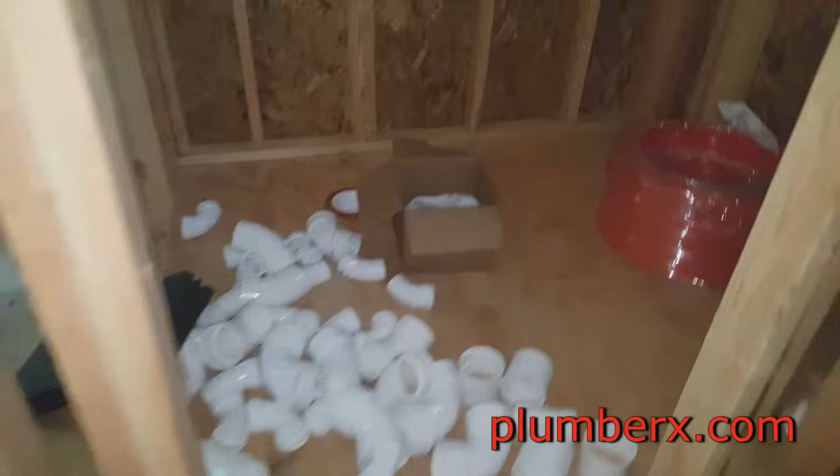Anybody can glue two pieces of pipe together. PVC? Anybody. True, but not so true. Gluing pipe together is one thing. The theory of plumbing is another. If you don't understand the theory of how plumbing works, you can't just glue two pieces of pipe together.

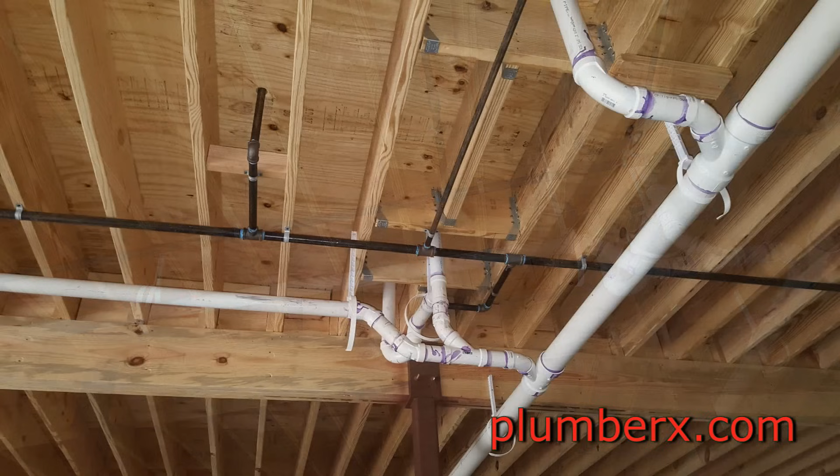You got to know the order that they go in and what particular fitting needs to go where, and the most important thing is how it's vented. Gravity is the biggest thing that we can count on in the draining system. Gravity. Anything that goes up must come down. That's not always the case in a waste system.

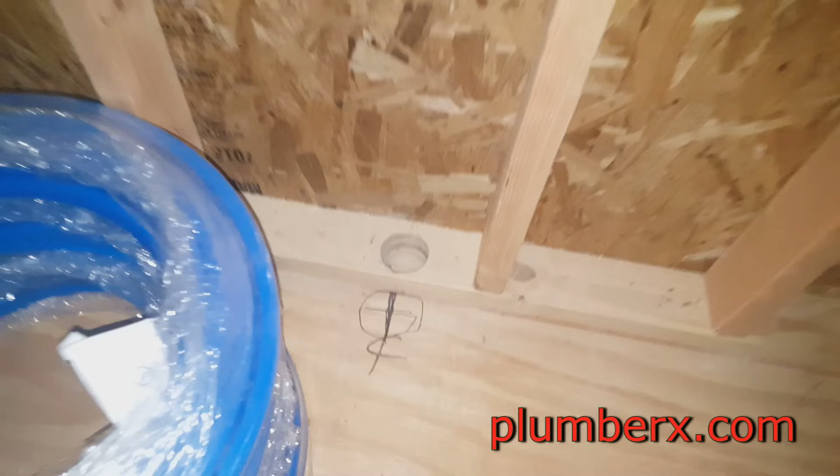In order for the waste and water in the pipe to flow freely, you have to have air, and that's when the vent plays a big part. A vent is just no more than, well, let's say you imagine this. You have a straw in your cup and you have a drink of water. Now, before you pull the straw out, you take your thumb and you put it over the end of the straw. So when you pull the straw up, the water is still in the straw.

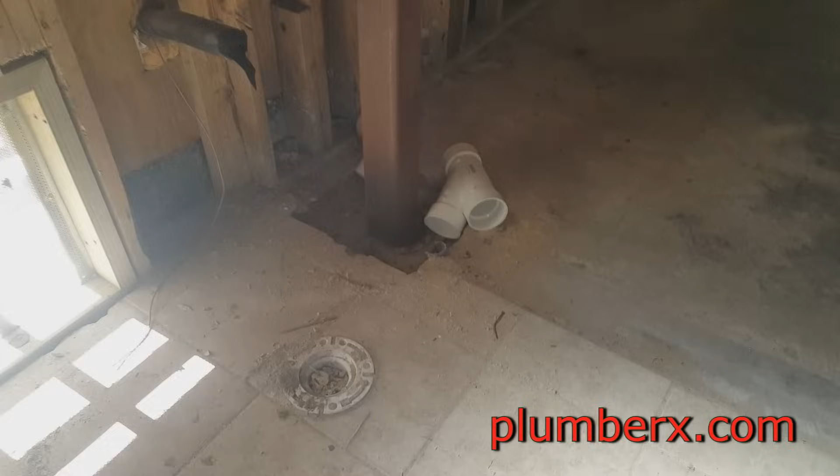Why is that? Because there's no air in the straw. Soon as you release the top of that straw, the water will come shooting out. That's the same process of the plumbing system. If you don't have a vent, you won't have an effective drainage system.

Okay, now we're starting to get to the good part, the nice juicy part, installing the plumbing waste lines. And what you see that I'm doing here is I'm starting to lay out my lines. I know exactly where the holes are above me and where I'm going, because the holes have been drilled out already. So what I'm doing here is laying the fittings out in the areas that I'm going to stop and the type of fittings I'm going to use, and it's going to make it easier for me to remember what is next.

And here's a lot of the fittings, and what I normally do is just throw them out, and I can pick right through them instead of going through the box. Just lay them out on the floor. And this is where the laundry is going to go. And this is the laundry box. It is a PEX laundry box made for PEX pipe only. And let me correct that, not only just PEX pipe, but Uponor PEX pipe. And that hole up there needs to be drilled out for the vent.

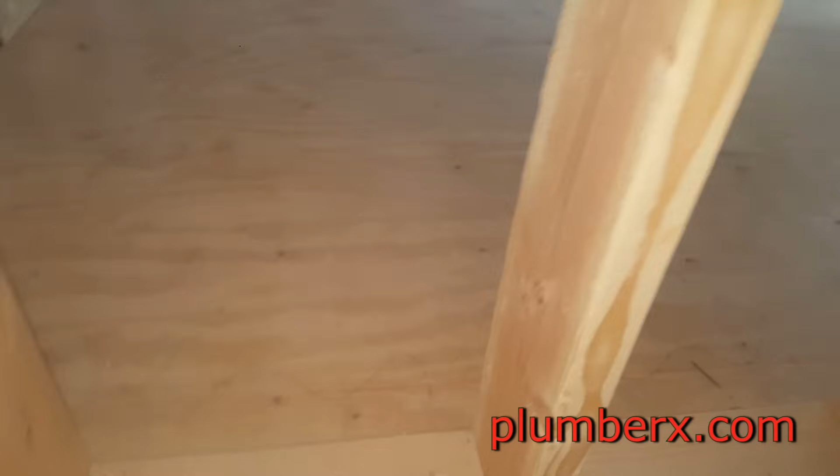I do have a guy that's somewhat giving me a hand on this job because I don't have the time to make it back and forth to the job as easily as I need to, because I work so far away. This is going to be the ice box, for the refrigerator, behind the refrigerator. That's going to be installed on that wall.

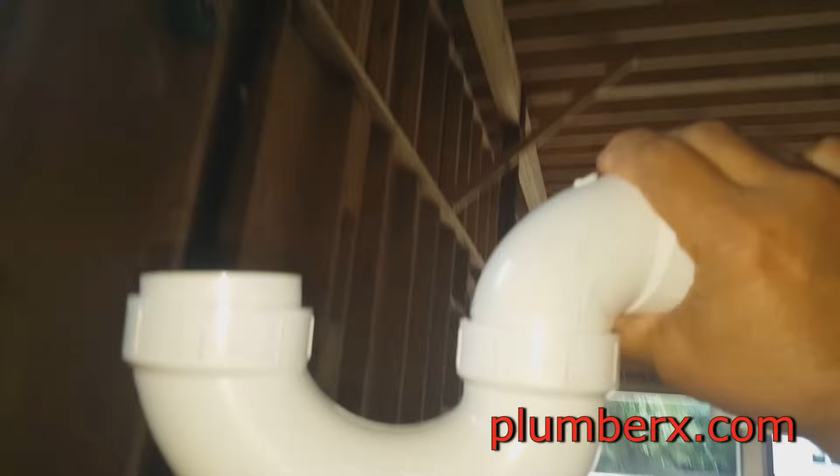And you can see the old plumbing here. Again, this house has been raised 12 feet in the air. And all the plumbing upstairs is going to be exactly where the plumbing was downstairs. So that's what you're looking at, where the old tub used to be right there. You see that hole? That's where this P-trap is going to be set up, right there. And again, as I said, I lay my pieces out so I'll know exactly where to go and what fittings I need where I'm at.

And as I was saying before, I do have a guy that's giving me a hand on this. He's actually working on the job full time, and I have my own full-time job, which is like 40 miles away. So I'm coming here when I have time to get in here and do what I need to do. So he's cutting the holes out for me.

And what we're looking at now, that's the old plumbing system. You can see how it was directly lined up with the columns. So that was not going to be able to be reused, which is good. Now we have a totally new system. And that's where another old tub used to be, downstairs.

And you can see how I have the fittings laid out. I know when I come right there, what's going to catch right here and right here. So rather than always looking up, all I have to do is look at the next fitting and I know what's next.

And this is going to be used for the toilet upstairs. You can see this toilet is actually exactly in the same line with the one upstairs. So I can actually use that one as a measurement rather than running up and down the steps.

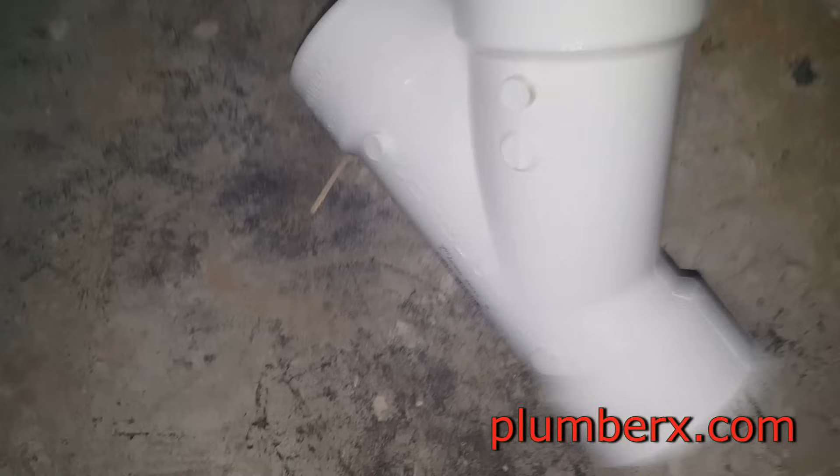And this is a 3-inch 45, and the other one is a 3-inch street 45. The street 45 is designed to go in a fitting. It's got a hub on one end and no hub on the other, so that it can go inside a fitting, giving you a closer fit just in case you're in a tight area. And on this application, I'm going to use it as a combination, what we call a combination wye.

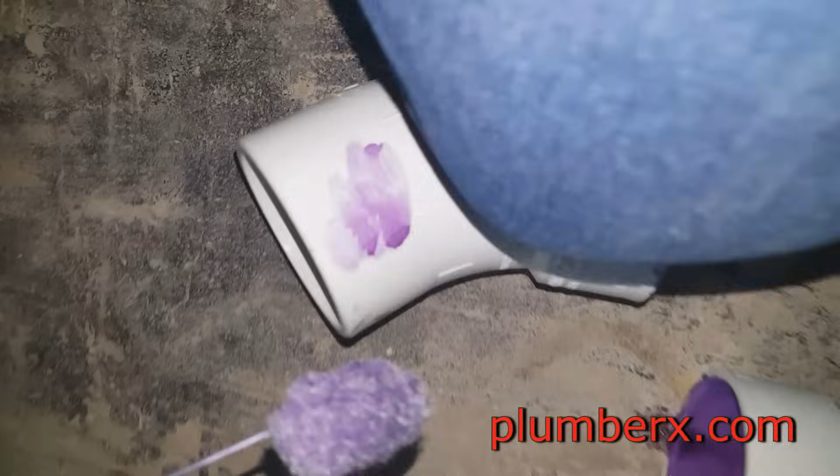This here is a 3-inch Y. So what I'm going to do is glue the street 45 into this 3-inch Y, and it's going to make a combination. It's going to be called a change of direction fitting once we're done, because when the system is flushing, this is going to allow it to change directions and go where we need it to go.

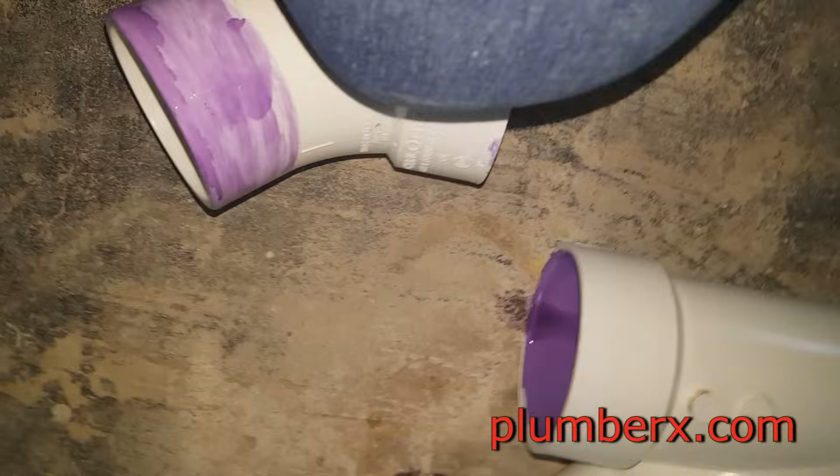And there's a joke that we have in the plumbing industry. When you buy a can of primer and glue, buy 2 cans of each, one to kick over and one to use. Never fails.

Now we're pushing the street 45 inside, and we're going to line it up right there. You can see the notches line right up, and that's going to get us exactly where we need to go. And this is going to go up in the air, one is coming through the main system, and then one is going to catch something else, a toilet.

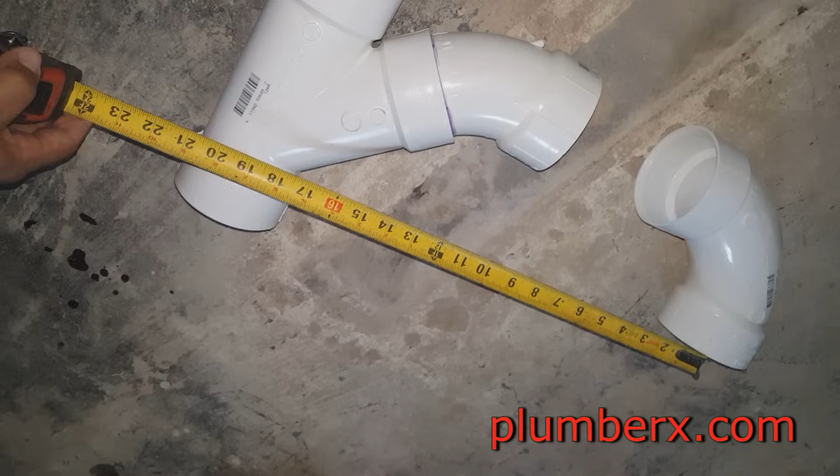And the way we take our measurements, we either go from end to end, or center to end, or center to center, meaning center of one pipe to the center of the other pipe. Right here you can see I'm measuring right up to that hub there, so that's going to be an end measurement. So that's center to end from the center of this 90. And that measurement came up to 10. So now I'll go back to this hub right here, and it's lined up with the 6. So my measurement's going to be 6 inches.

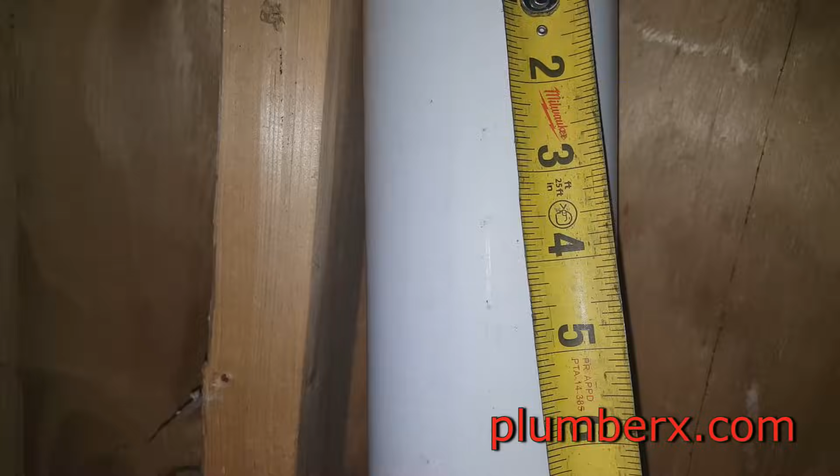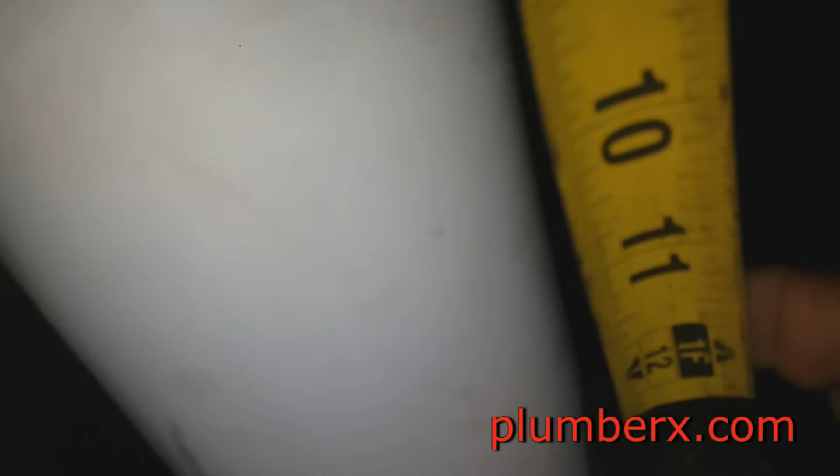And there's a more technical way of doing it, but sometimes being technical can be very slow and slow you down. If you want to sit and stop and take out your pen and pencil, write things down and measurements, there's little tricks that you can do with the measuring tape that eliminate a lot of that and save you a lot of time. And I mark it like that, like an arrow, so that I know exactly the middle.

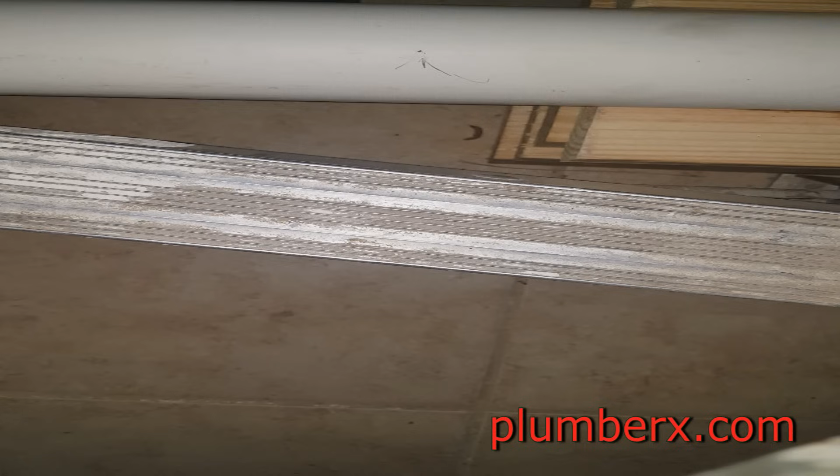Now I do have a chop saw where I can cut this a lot faster, but the guy that has the keys to the house to unlock the electrical box is not here right now, so I have nothing to plug it into. So what I'm going to do is use the PVC saw.

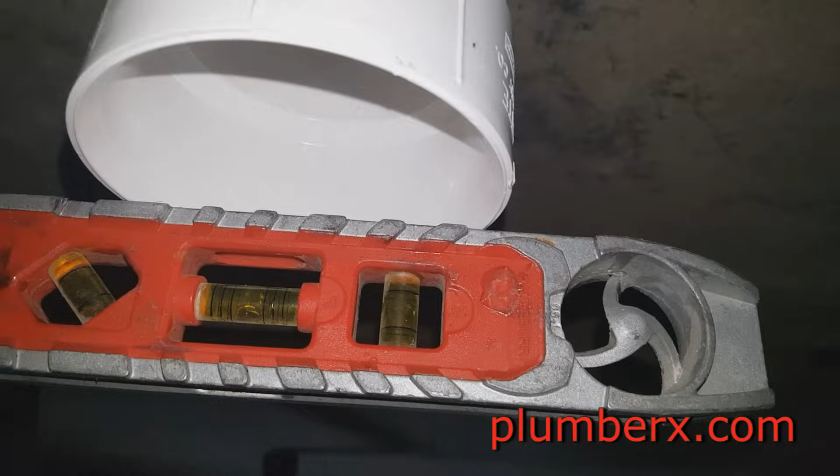And that's one thing about plumbing: you learn to work it backwards and forward, because there are a lot of times that you're not going to always have exactly what you need, but you can't let that stop you, so you continue on until you get the things that you need, and things work out great.

And this is going to be for the toilet at the far end. See, I'm measuring from the center of that pipe to the center of the elbow to see if I actually lined up pretty good. So now, before I glue this piece together, I leveled the 90. You saw earlier, I was leveling the 90, and it came out level, nice and straight. So now I want to mark exactly where I want the two pieces to be glued, so that when I glue it together, it's in place where it needs to be.

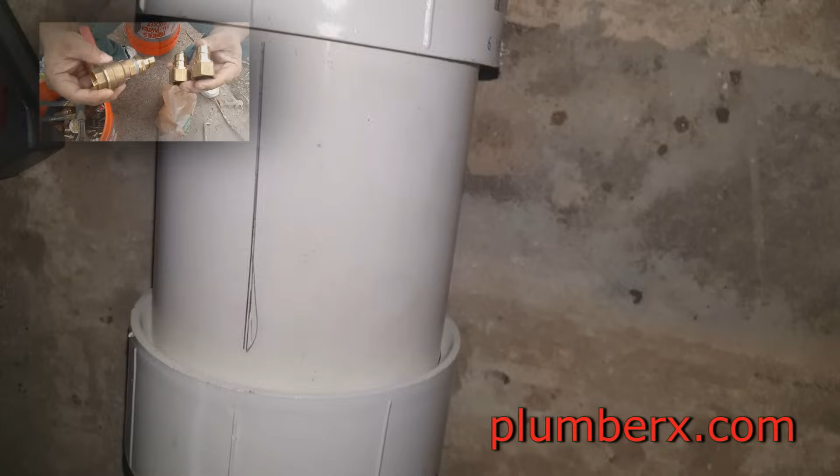And if you watch the video close, you'll notice that a lot of the work that I do is actually on the ground before I can lift it up and put it in place, because it's a lot easier to work with it when you have an open area and you have it down on the ground than to climb up and down a ladder constantly measuring and gluing. If you can do as much as you can on the ground, that's great. Makes it a lot easier.

And what I'm doing right now, I'm just kind of eyeballing exactly where this is going to go, and it's going to go right here. This is actually close to the end of the run of the drainage waste pipe before it goes into the ground and ties into the outside drain.

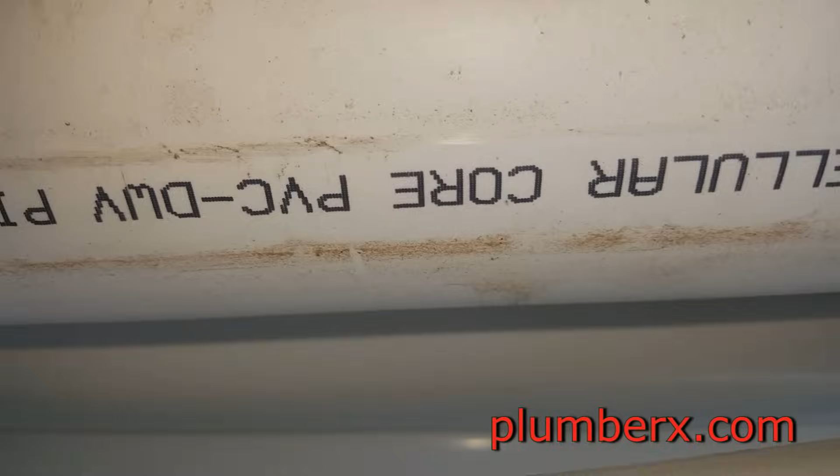And this is the PVC pipe that I'm using. This is the foam core, which is lighter than the other PVC Schedule 40. They're both also Schedule 40. It's just that the foam core is much lighter, and foam core you want to use inside, and the other stuff you do want to use in the ground if you're plumbing in the ground.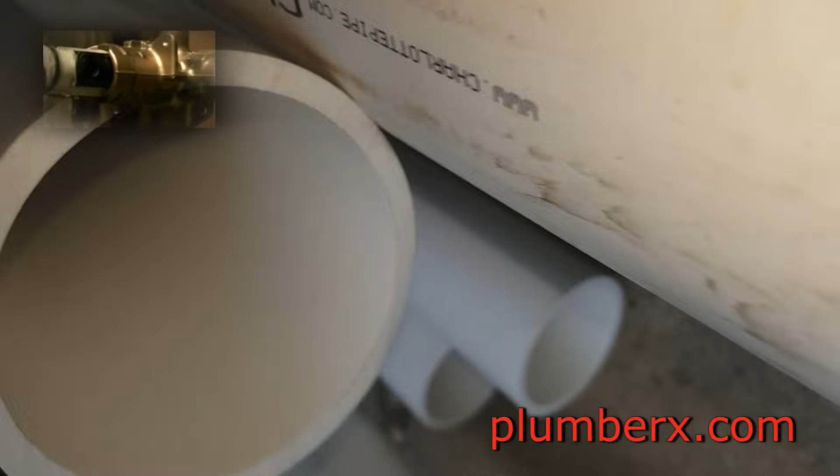Okay, you can see that I kind of pre-made my piece up before I just take it up in the air and stick it in place and glue it. All the fittings have been glued on. Most of them have been glued on down on the ground where it's easy to get to, easy access. And now all I have to do is just glue in one piece from the ladder. So I'll just take this whole piece up and bam, there it is. It's glued in.

I took all my measurements off the ground and just put it up in the air. There's two holes that you see there. One is for the vent and the other is for the toilet. Okay, I took it back down, and this time I actually glued it in, and I put the level on it. You always keep this torpedo level, is what they call it. Keep it in your back pocket, because you're going to constantly use it when you're running these pipes, these waste systems.

And now you can see I have my combination fitting, which is a 3-inch sanitary tee with a 2-inch side outlet on the right hand side. You can buy one that's left-handed, so if you're looking for one of these, you ask for a sanitary tee with a 2-inch side outlet, left hand or right hand.

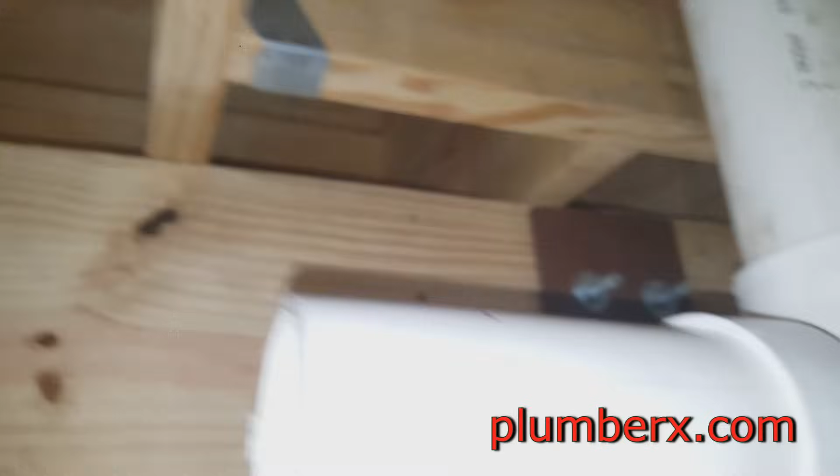And again, I am trying to piece as much of it on the ground as I can. So I do have it in place to take some measurements and line it up. And that's the toilet we're shooting for. You can see the toilet flange up there.

Okay, now we're upstairs, and you'll see this is the one toilet at the end of the line that we tied into, and it will vent out through the roof once a hole is drilled through there. And this is the tub and shower. I installed this about a week or so back. Yep.

And this is the kitchen sink, and of course there's the vent going out again. We're not going through the roof yet. Actually, we're going to have to wait for a roofer to come so that he can put the roof flashings on the roof before we can go out there and install the pipe. We're not going to go out there. We're going to have a roofer do it.

And this is being set up for the water lines, if you remember the old video.

And this is the young guy that I was actually training. He's not exactly a Picasso with the glue and primer, but he's going to be a really good plumber.

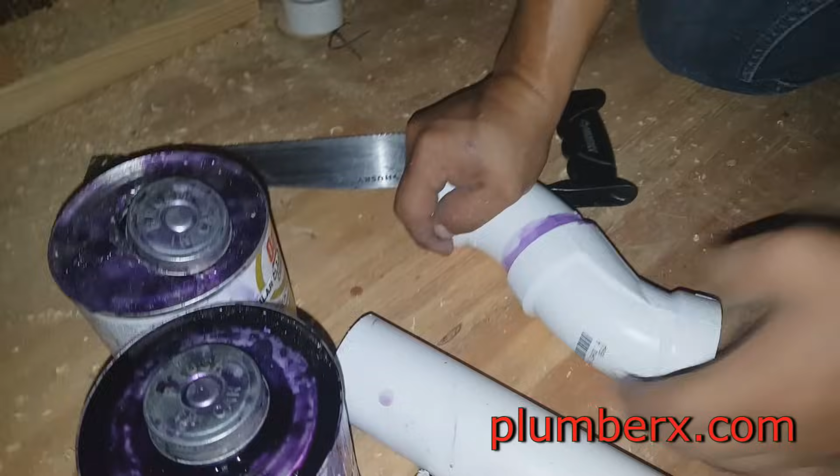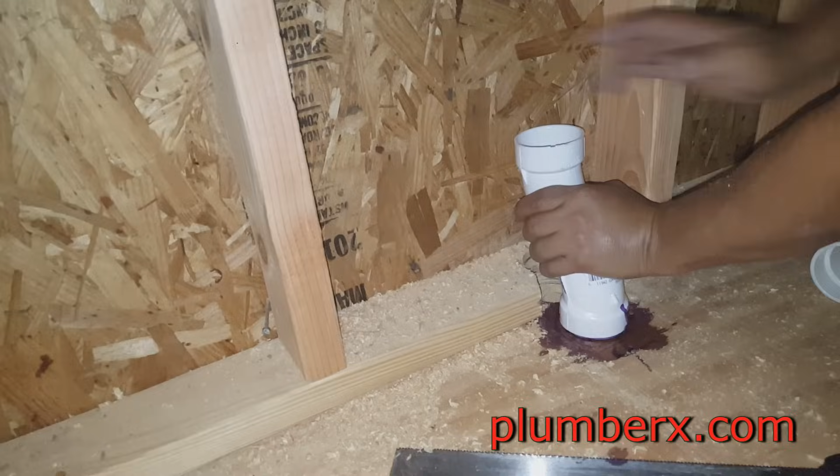And this, if you can notice, is drilled actually outside the wall, but we're going to use a 2-inch street 45 and a regular 45 and get it right back into the wall. And the reason is because just below that wall right there was the floor joist, and we didn't want to drill into the floor joist right at the end where it was. It's a vulnerable spot, so when the cabinets are put in, it'll cover that up.

And this is a 2x1.5 inch sanitary tee. I could have went with a 1.5 inch vent, but this just makes it easier to simplify the plumbing. This is going to pick up a bathroom sink, and all bathroom sinks are going to be anywhere from 1.25 to 1.5 inches. Nowadays, mostly 1.5 inches. Back in the day they did use 1.25 inches. And it will be adapted to fit the P-trap up underneath later.

Okay, like I said, we're going to go back and forth with this video. Here's the tub in place, but it's not connected to the drainage system. This is the vent for the toilet here in this area. And that's the vent over there for the...

Like I said, my help is not exactly Picasso with the glue and the primer. I have to chuckle a little bit. He'll get it. I can tell we're going to go through some glue and primer in this job.

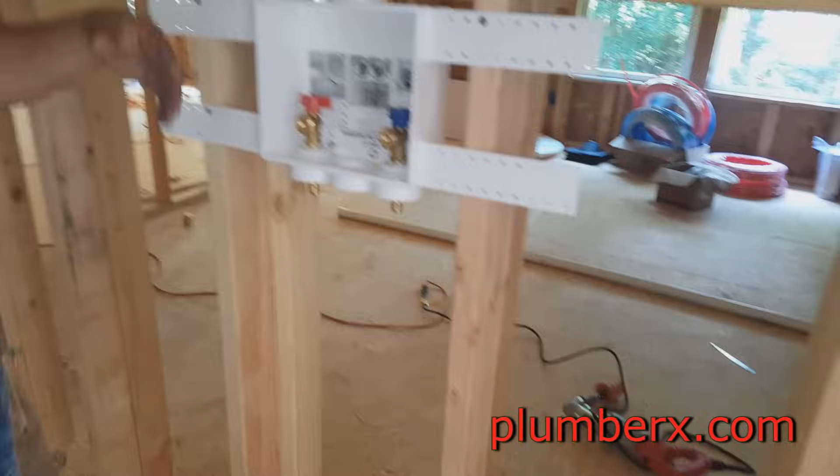Okay, now that's done, and this is the vent going out. And again, that hole's drilled already, but the vent's not going to be installed until the roofers come out. And all we have to do is just stick a straight piece up there and let the roofer install the flashing around the pipe. And that's going to be the vent for the tub.

Okay, there's the laundry in place, and there's the water lines. And this is the drain and waste system for the laundry. Now on the water lines, I'm not going to cover the water lines in this video, but I do have a video that's exactly like this one. It actually is the same house, but it was the house below when it was on the ground.

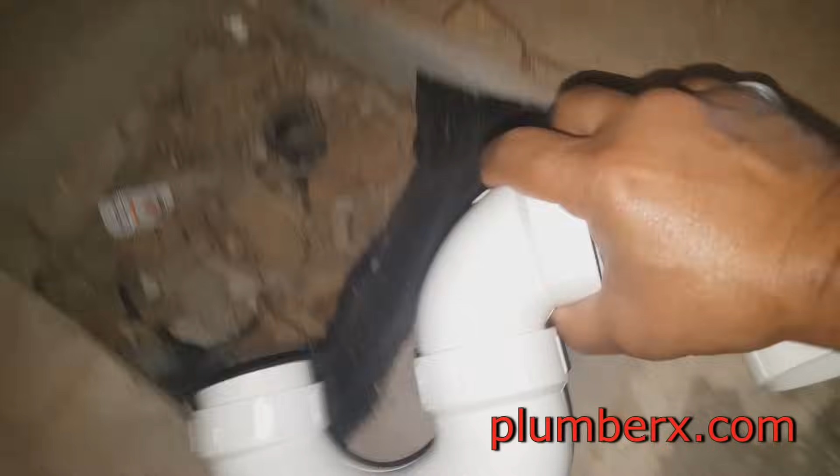And the smaller piece that you see me slipping in the inside, this being a 2-inch P-trap, the tub is only 1.5 inches. So we're going to reduce that part down to 1.5 inches right there to catch the tub. And that's where the other tub's going to be, and that's where this P-trap is going to sit, along with a sanitary tee, which will catch the drain and vent the tub at the same time.

And just like we talked about the tub, directly above this is exactly where the toilet is going to be. So what I'm doing here is, rather than run up and down the steps, I'm going to take my measurements off the one that's down here because I know it's going to line right up with the one upstairs.

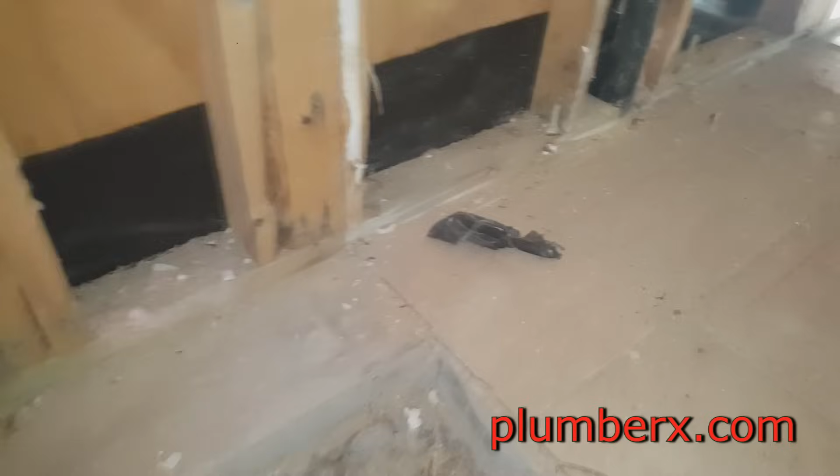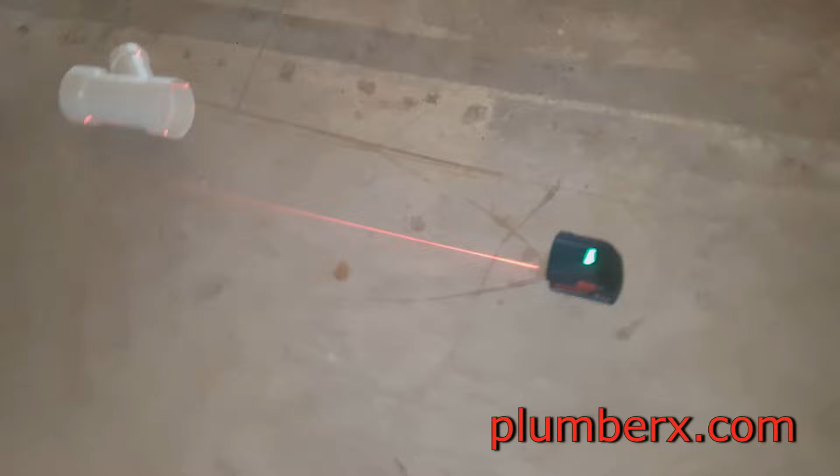And earlier, before I actually started laying this stuff out, I pulled my laser out the truck and just kind of played with it to give you an idea. A lot of times on commercial jobs, you're going to use a laser like this one here, so that I can actually visualize exactly where my line is going to go. You put the laser and follow the red laser line. As you can see there, that's going to keep me in line exactly where I need to go. And I can go up there and take measurements off those lines.

But I don't expect most people that are going to do a house to have one of these. It's just something I'm playing with a little bit to give you some information on the video about laser work. It really comes in handy in a lot of commercial jobs.

So what I actually did is I went up there and took a measurement off that beam, from the middle of the beam to the laser, and that's how I got my measurement, and that's how I knew where I wanted to be with the drain. Right down this wall here.

And this was one evening I came back and I just installed the tub and shower faucets. I made those up at home and brought them out to just set them in place, and the shower head is going to be set at 6'6". 6'6" is the standard rough-in measurement for a tub and shower valve.

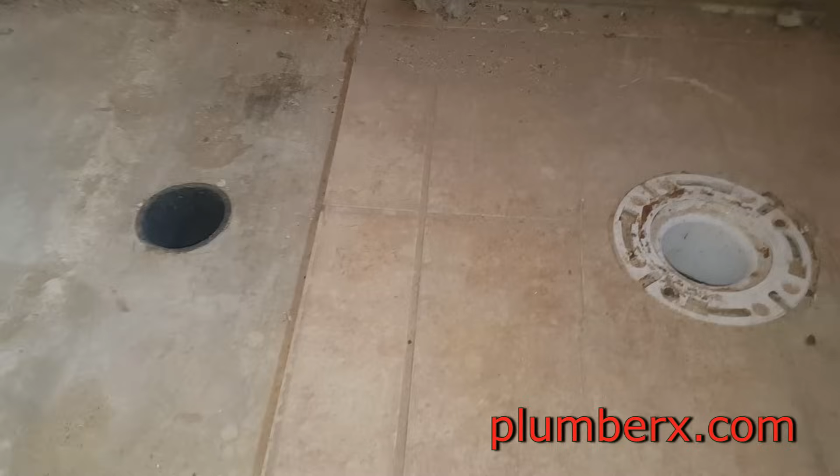And this is a measurement that I'm taking center to center for the toilet upstairs. So once I get the center to center mark, rather than sitting there and doing it on paper, all I have to do is take the measurements off the fitting itself with a little trick using the measuring tape. So I already know the measurement from center to center. And I just need to measure from the center of the fitting to the hub and take that amount off, and that'll give me my measurement of the pipe that I need to cut to fit in here.

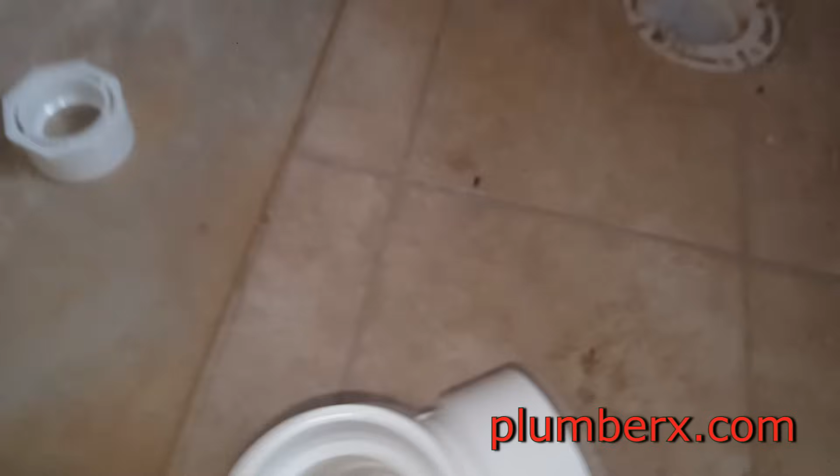And what I did is marked on the floor 23¼ inches. And now I'm going to take my fittings and set them to the center of that line, that mark right there, and the sanitary tee to the center of this fitting right here. Now all I have to do is measure from inside hub to inside hub, and there's my measurement.

Which looks like, what, 17? 15 and 16 3/4. Nope, 17. 17.

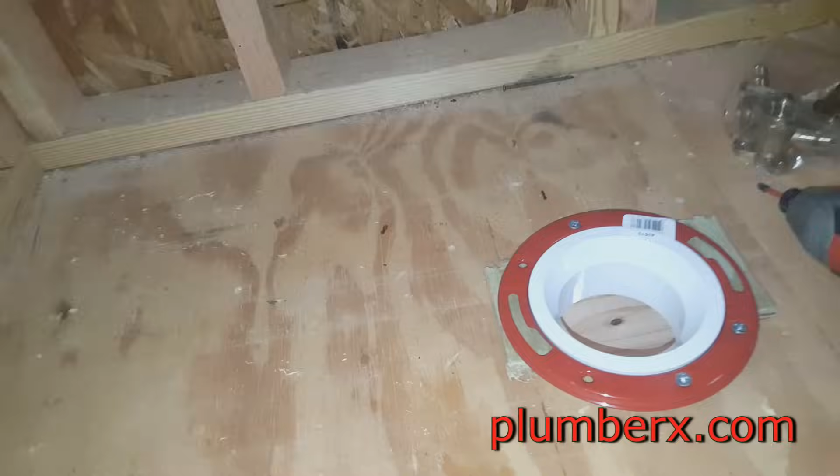And before I glue anything in downstairs, most plumbers are gonna screw the toilet flange down to the floor. And you can see the pieces that I put in there. These are the pieces that are going to make up for the tile or backer board that's going to be on the ground. So I'm kind of lifting the toilet flange up a little bit, so that'll keep it in place. So when the tile guy comes around, it'll be set.

Okay, now this is a piece that I made up downstairs, so that I didn't have to go up and down the ladder. And this is going to be for that toilet. And the long 2-inch piece that you're looking at is going to be the vent that goes out and up and through the roof. So now that I have it in one piece, I can just slide it up in place, glue it into the closet flange, let it hold, and it's going to be set for now. There's the 2-inch vent hole and the 3-inch toilet drain.

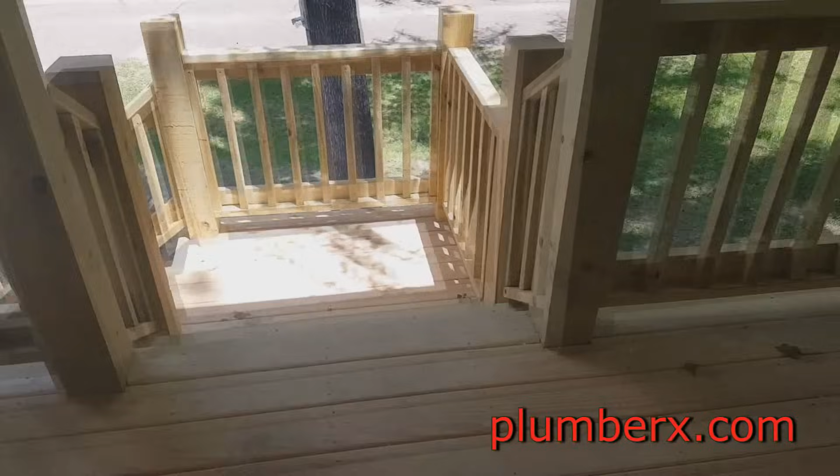Okay, I've come upstairs to check how it's lined up, and you can see how easy that was. I didn't have to sit there on the ladder and try to piece things together. Okay, I'm leaving this part in the video just to give you an idea of what you would have to do working on a particular house like this. Look at all these steps I have to go up and down. So it only makes sense to try to fit everything downstairs as much as you can to keep yourself from running up and down the steps.

And that's exactly what I'm trying to do here, is make my cuts, make my fittings, put everything together, slip it up in place. I am going on top just to check every now and then, but I don't have to go up and down as much because I can do as much as I can down here.

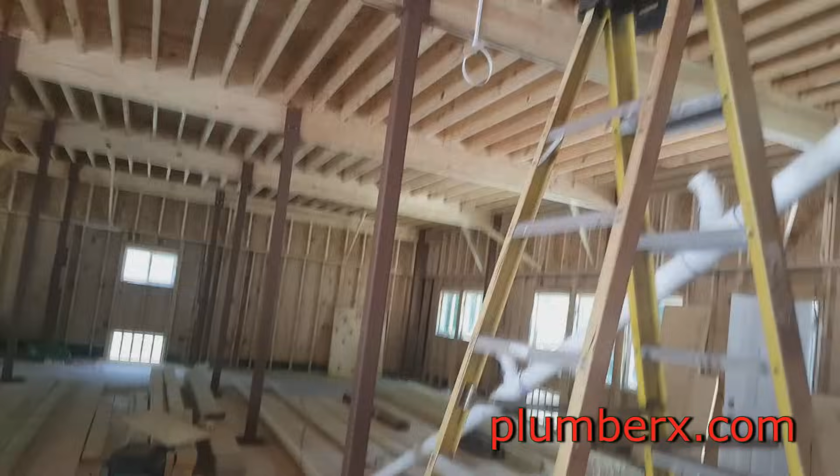Now, since I'm working on this job by myself today, sometimes you have to improvise. So what I've done is, of course, I prefabbed the piece and then I set it in one hanger so that all I have to do is go to the other hanger, lift it up, and place it in. And it's a done deal.

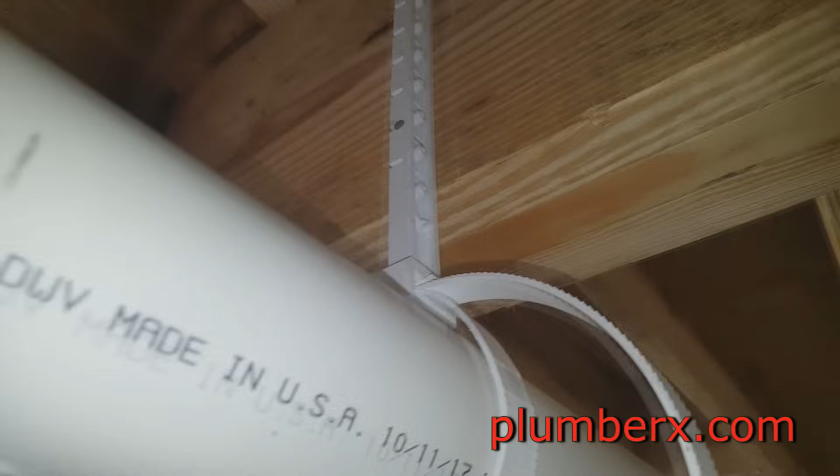And like I said, always keep the torpedo level in your back pocket, because every now and then, which is quite often, we're going to need that level to make sure that we have the right proper pitch on our pipe. And there we go. We have the nice pitch where it's pitching the way that we want it to go. And it doesn't take that much of a pitch. You may think to yourself, the more of a pitch it has, wouldn't that make it better for the flow of the waste and water to wash things away?

That's not exactly true, because once you have too much of a pitch, if there's a spot there that really needs to be flushed away, it's not going to go away because the momentum of the water is going to rush right past it, and then eventually you have a spot where it could possibly build up and clog. So the best thing to do is keep just a small gradual pitch, and that way it keeps enough water in the system that whatever debris is there, it'll keep it soaked nice and wet so that when the flush comes through, it will wash it away.

And again, I'll mention it throughout this video. You notice the hangers up there. I don't have many hangers, and that's only because I'm trying to just get it in place for now, and I will come back and put other hangers in. But on PVC pipe, you want them supported every 4 feet. Just something you can keep in mind.

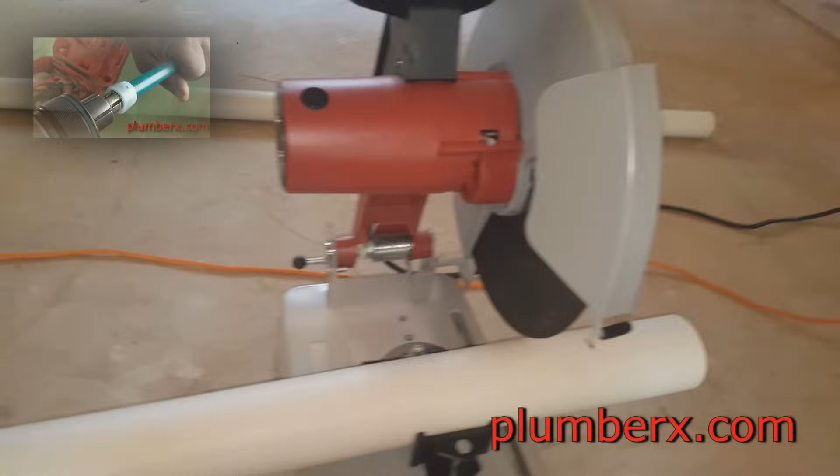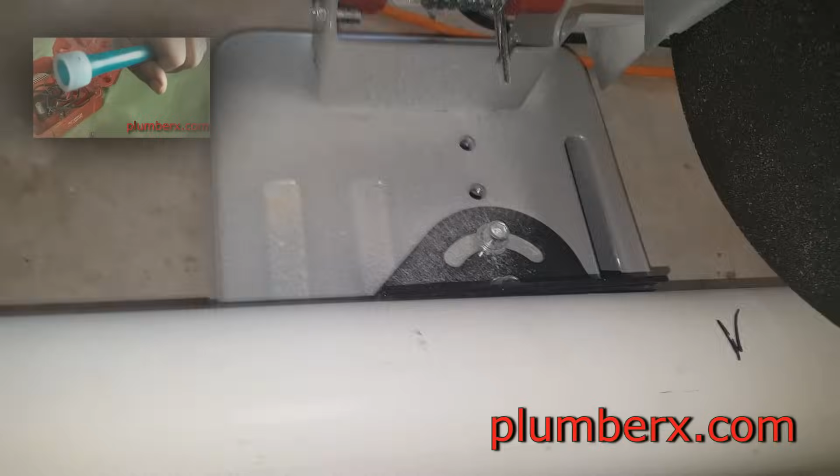And here's the chop saw I was talking about earlier. The other guy showed up, so I was able to get power in here so that I can use the chop saw. It's a lot faster than cutting it by hand, and it's going to be a lot straighter. And on most job sites, this is what you're going to see plumbers using to cut the PVC pipe.

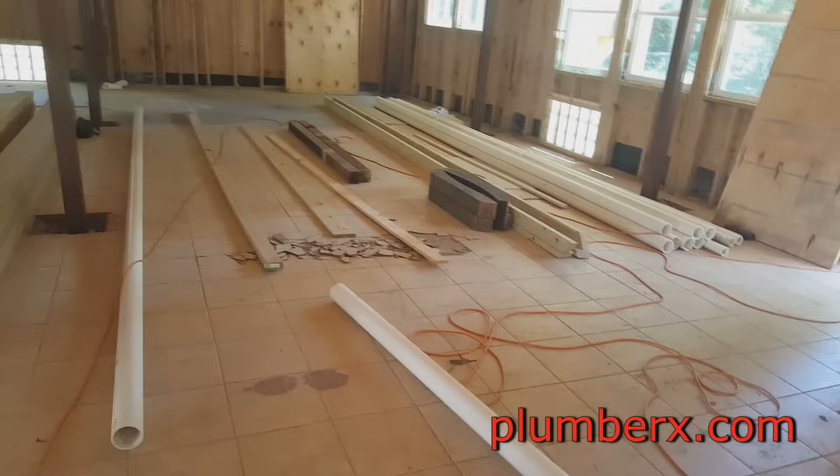And now again, what I'm doing here is just kind of piecing things together. Again, I'm going to put as much together down on the ground as I can, but there are times where I will need to get up on the ladder to get some other measurements. But this stretch, I'll put the pieces in and be able to just lift it up and put it in place and not have to do too much gluing up top.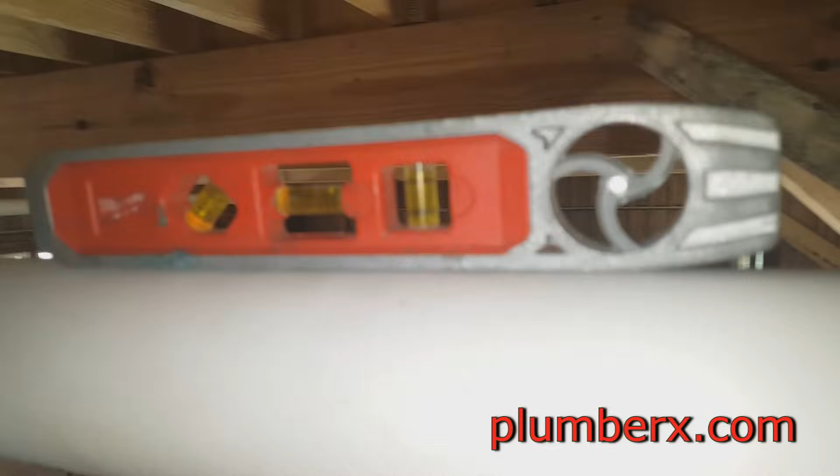Okay, I've got that piece in and leveled it, and I'm also checking the level on the drain coming from the toilet. Okay, now I have my straight piece in together and it's all straight. I am going to come back and cut into that pipe so that I can go ahead over and catch the tub and the sink, the bathroom sink upstairs. But at least now I have it lined up nice and even the way I want it.

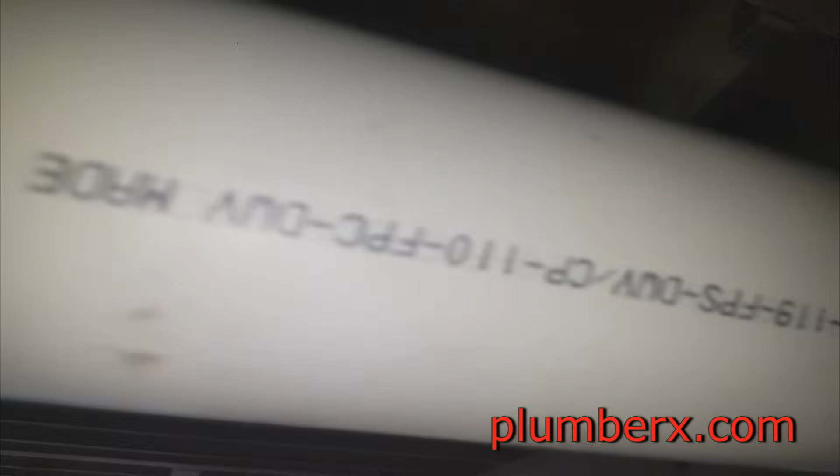And you'll see this throughout the video a lot also, because I'm constantly going back and forth to see if things line up and trying to catch anything that I see wrong before we go too far. So I'm constantly checking them, and you should do the same.

And at the end of here, this run here, you can see that I put a clean out. This is because it's such a long run, and in the future, if they have any stoppage or anything like that, they can just run a sewer machine or a cable and pull that cap and run it through there.

Okay, I came back and I cut a new spot into the line, as I said before, and this is going over to catch the tub and the bathroom sink upstairs.

Now these are the blueprints to 3 houses that are being built. One thing to keep in mind, it's just going to give us a top view of where the toilets and face bowls and the tubs are going to be. It's nothing like what you would find in a commercial

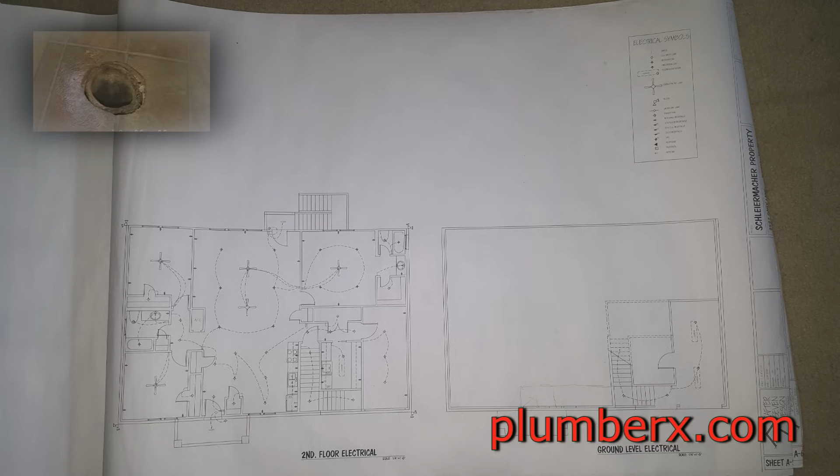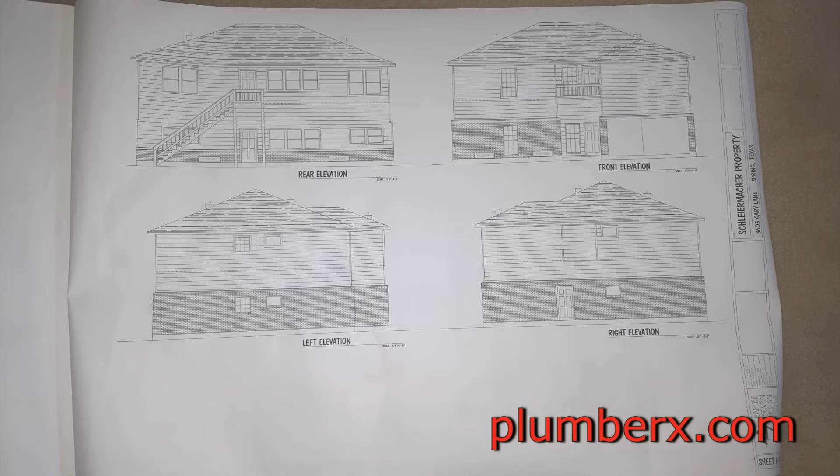blueprint drawing. A lot of the residential blueprint drawing, the plumber goes in and the electrician and heating and cooling guy. We are the ones that design the plumbing system, the HVAC system, and the electrical system in the home. But when it comes to a commercial, those are designed by architects and engineers.

But on a home, since it's so basic and so simple, because a lot of times we have to modify things, we make it happen. So the plumbing that you see in this system here is something I designed in my head and made adjustments when needed.

And to develop a plumbing system like this, it takes years of practice, and I've been doing it over 30 plus years. So you're looking at a lot of years of practice doing this stuff.

And as I was saying at the beginning of the video, yes, anyone can glue 2 pieces of pipes and pipe fittings together. But to know why you're doing what you're doing, that's the trick. That's the key to putting this all together.

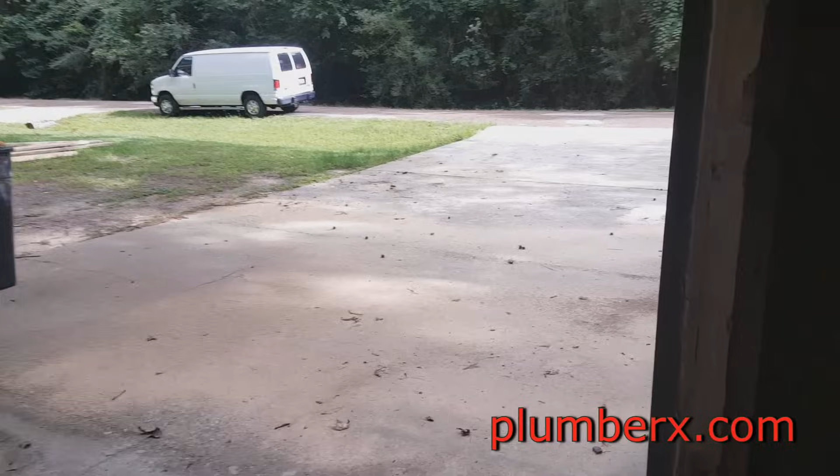And again, which was for the best, because we didn't have to deal with that old plumbing system that's up under this slab. No telling what kind of condition it might be in. So we have access to all new drain and waste lines. And we'll go outside here to see where it's tied in.

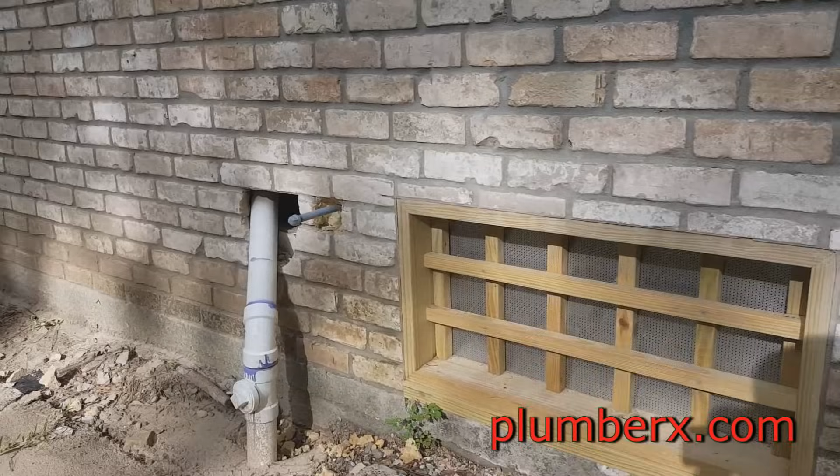And we've installed a clean out at this end also, because now that it's going into the main, if there's a stoppage between the street and here, we can clear that line from there.

Now from outside here, you can see that it's offset over, and where that clean out is, right behind that wall, is exactly where the pier and beams are, and that's the reason we had to do it the way we did it.